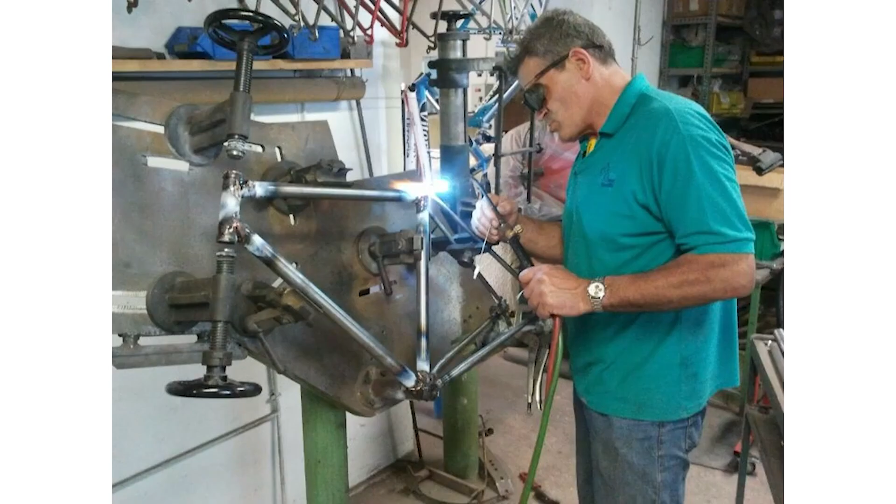When you weld a frame, what happens? When you weld something, what happens? When you weld pipes together, stresses develop in the pipes, right? Your pipes are never in one line. So your front wheel and your back wheel in all our cycles are never true.

If they are highly true, they'll be the best cycles. You'll be having very little load to bicycle. They'll be phenomenal. You'll see the difference drastically. So here the biggest challenge was getting the pipes in one line and getting your front wheel and the back wheel in one plane, in exact one line. And that is the most important test for a bicycle's accuracy and cost.

And we were very lucky. Mr. Munjal, who was the senior guy, was around 75 to 80 years at that time. He came and gave us this very interesting one-line brief saying that we need to innovate. We need to come up with a bicycle which can beat the Chinese competition, but also have a form factor which is very different from the current cycle.

So we were very inspired by him, because at that age he could give that type of phenomenal direction to the project, whereas all other people from marketing and all were talking about their current problems rather than looking at that.

Here the actors are the student, guide and the co-guide. I told you, co-guide is from another discipline. For example, if I'm doing bicycle design, I would take a co-guide from applied mechanics. The professor from applied mechanics was our co-guide in the project. So we have a 3 people team.

Then the second team was from the company CEO. The top management support is very critical. So here we have the CEO coming in very closely. Head of design, GM marketing, and head of export division. This is chosen by them. Hero Cycles also exports a lot of bicycles all over the world.

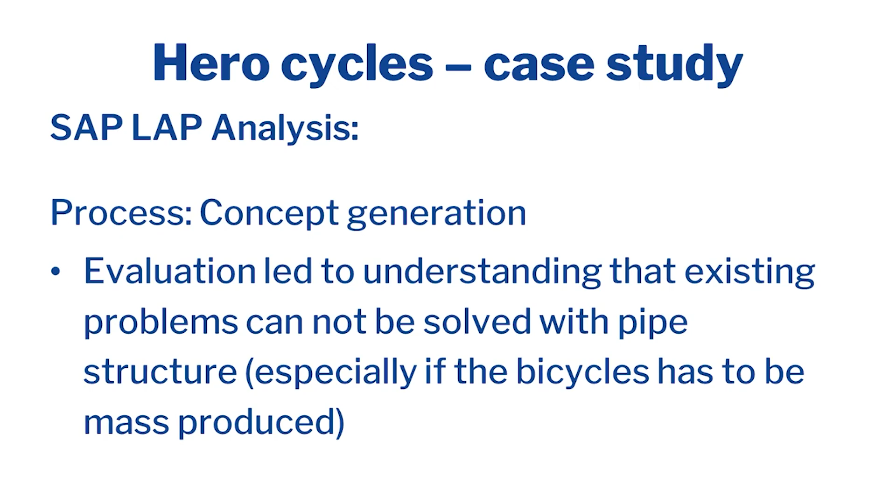So we did the data collection, we found out what all is happening, and then we came up with a lot of ideas which are important for us to see whether we can merge all this and come with a cycle idea. And cycles have been very phenomenal in their simplicity and use. So what type of ideas can we come up with was the biggest challenge. So we want to solve the pipe structure problems. So the pipes were the biggest problem because the welding was getting stuck.

All of you know the bicycles. The weldings were not proper. The welding was taking a lot of time. Then we also looked at the possibility of use of other materials. How many of you have ridden aluminum bicycles, aluminum alloy bicycles? Very good. They're very light, right? What happens when the cycle is light? It moves faster and with less effort, right?

But the aluminum alloy is so expensive that the cycles generally cost 3 to 4 times the regular bicycles, because aluminum is difficult to weld and the alloying is a special process.

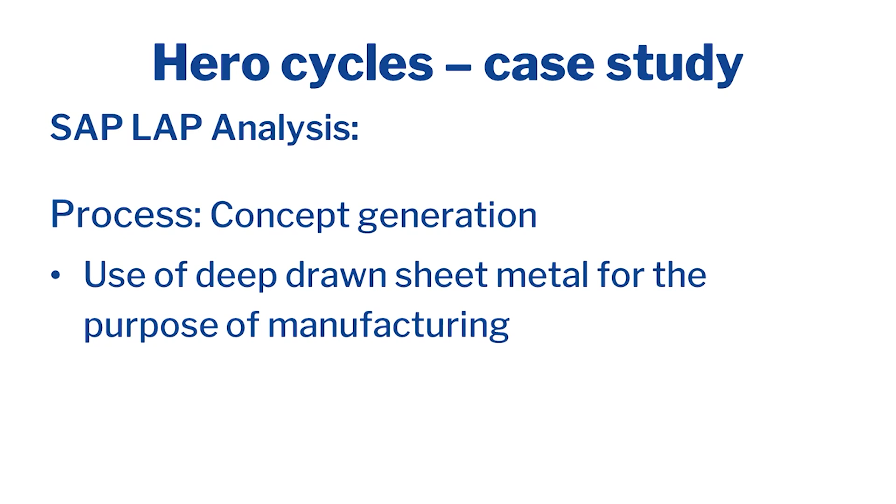The biggest breakthrough came when we did the idea generation for a deep drawn bicycle. How were they manufacturing cars? They're manufacturing cars by sheet metal draw, right? The car body is drawn by large presses. You will see on videos. So when the large press is pressed, you get a whole part at one go.

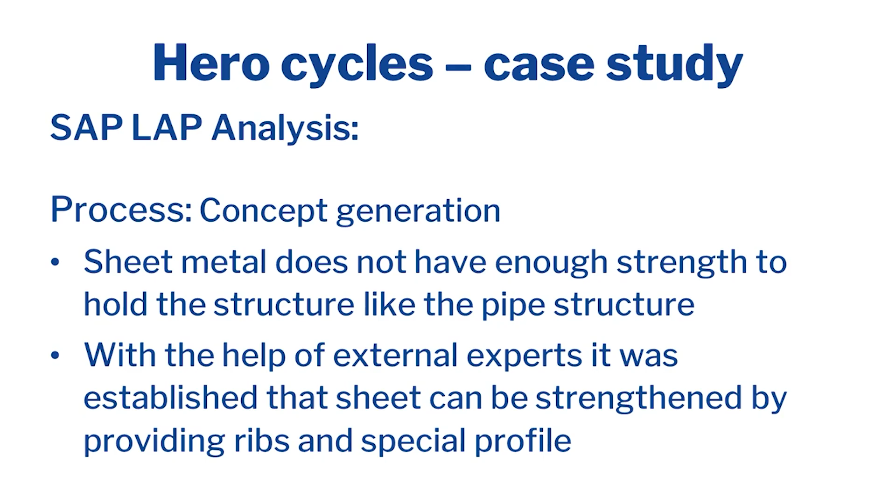So can we manufacture bicycles, rather than pipe welding, by the deep draw process? That was a very big insight, and we'll show you how that insight went forward.

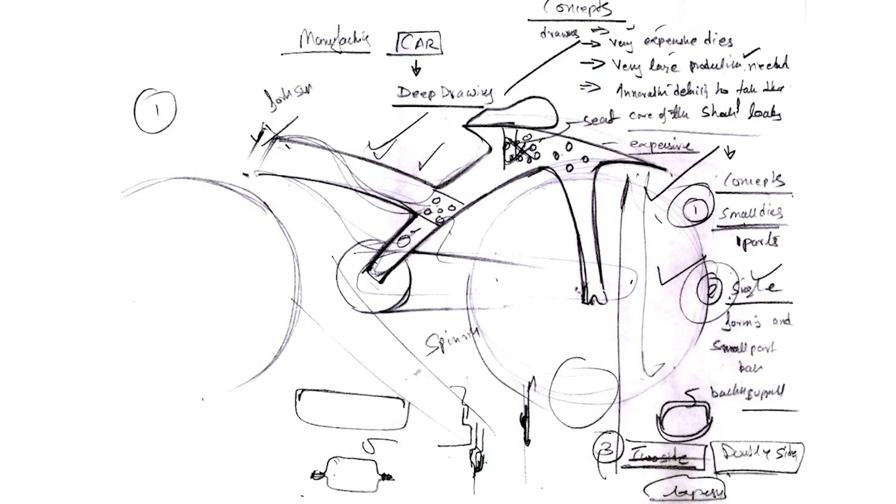So a lot of ideas came up with aluminum, die-cast materials, aluminum pipe structures, mild steel structures, riveting the structures together rather than welding, because that was taking a lot of effort. And here finally you come up with your focus cluster. So here you have 3 focus clusters with 3 different types of materials.

This first concept is a sheet metal drawn bicycle. Isn't it interesting? As soon as it becomes sheet metal, what's happening to the handlebar? It's become very long. Because in sheet metal, if you've got to get the same stiffness, your length of the fork will have to be increased. Otherwise, it will start wobbling.

So this is a very interesting characteristic of a sheet metal, and all this is drawn at one go in a press. So you get a one single frame bicycle. And this single frame bicycle, you can have special alloys to make it very lightweight. Here, for example, you have box pipe frames made up of aluminum. Aluminum box frames are very lightweight and cost effective in welding, easy to weld.

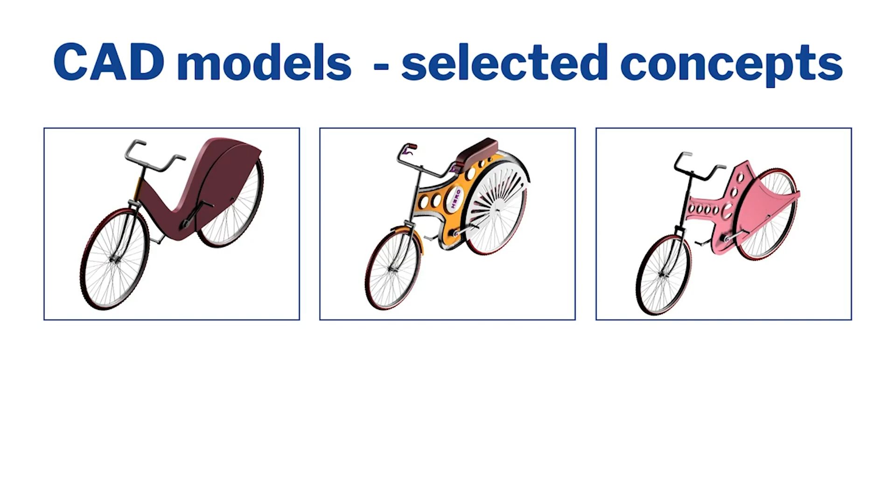So this was on box frame welding. And here it was again a mild steel, structural welding, which was again being used over here. And the sheet metal concept was selected as the best concept because the advantage of using the sheet drawn concept was that it would become very cost effective. The prices will drop straight away by 75%.

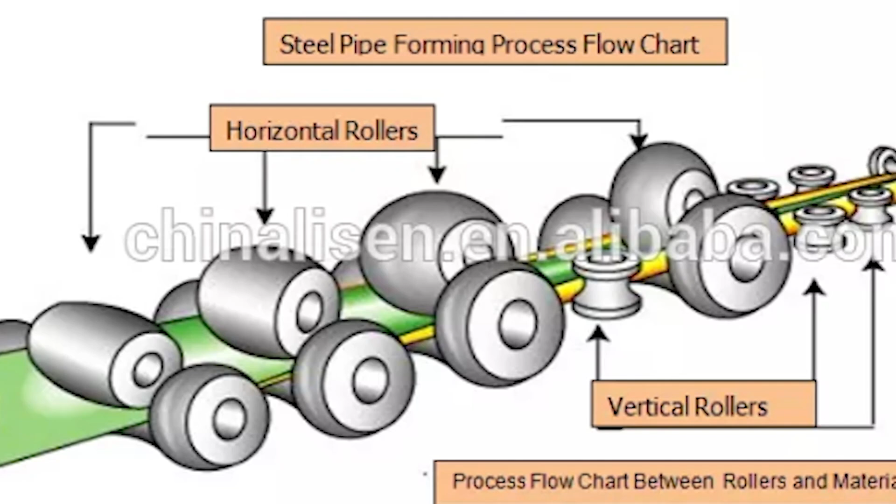Because what happens in a pipe bicycle is pipes are actually sheet originally. They cut the sheets and they roll them into pipes, and that's how the pipes are manufactured. Pipes are not extruded. Cast iron pipes are extruded. Most of the pipes are sort of rolled and welded.

So just imagine if I directly take the sheet and use it, my cost will be very low, and because of the manufacturing process of deep drawing, it's a very fast process. You get no welding, no cutting, so it will become very cost effective. You can see how the whole frame has been built in one go, and then the further development happened.

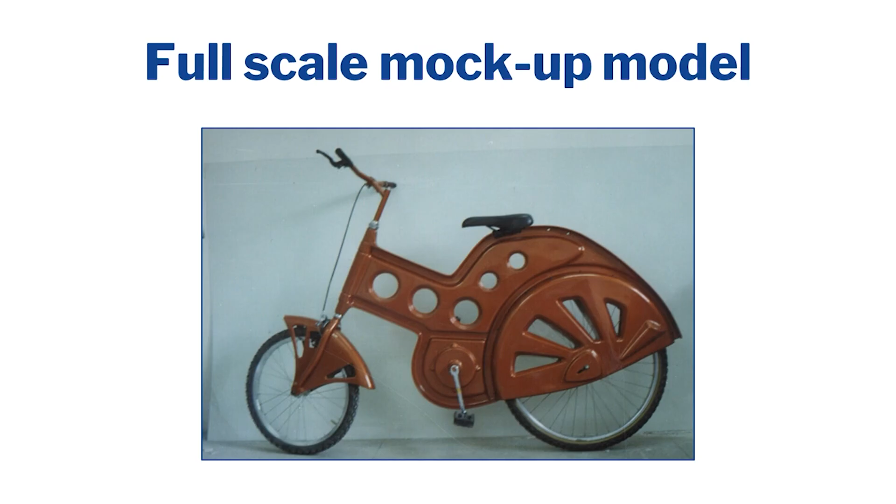And then in the same process, we have something called the mock-up models. Remember, I was always talking about mock-up models here. So you build mock-up models of this to understand how the design would work, and from these mock-up models, we built one full-scale mock-up, non-working mock-up, because you need special steels to make a prototype, and it was very difficult to procure those steels at that time, and you needed tooling which would become very, very expensive.

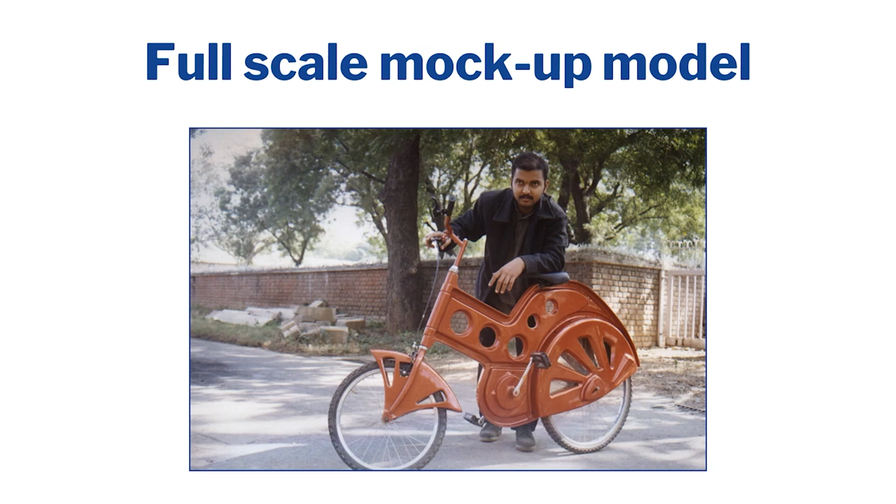So this became the option for us to show to the company, and of course the company was very thrilled to see this product because the cost was actually finally 75% of the current cost of whatever material they were using. But the biggest challenge here was the tool cost was very high. So they had to invest around 50 lakhs in tooling to produce this bicycle, which will be 25% cheaper.

So what did we learn from this journey? The interaction of the first team with the team of experts was iterative in nature. This interaction with the experts who are doing the sheet metal drawing became very iterative, and the concept development happened with experts from the manufacturing sector in sheet metal. At the concept detailing stage, one concept was preferred over the other. The other concepts were not chosen because of the focus.

The main reason for our journey was that we needed to start with the low cost aspect, and all the other concepts were not low cost. So we chose the concept which would result in low cost production. So that was the reason. And the main learning was that the solution to existing design problems may lie in completely new paradigms. What is this new paradigm? Car manufacturing. The car paradigm of deep drawing. And cars are cheap only because of deep drawing and because of the large manufacturing base which they have.

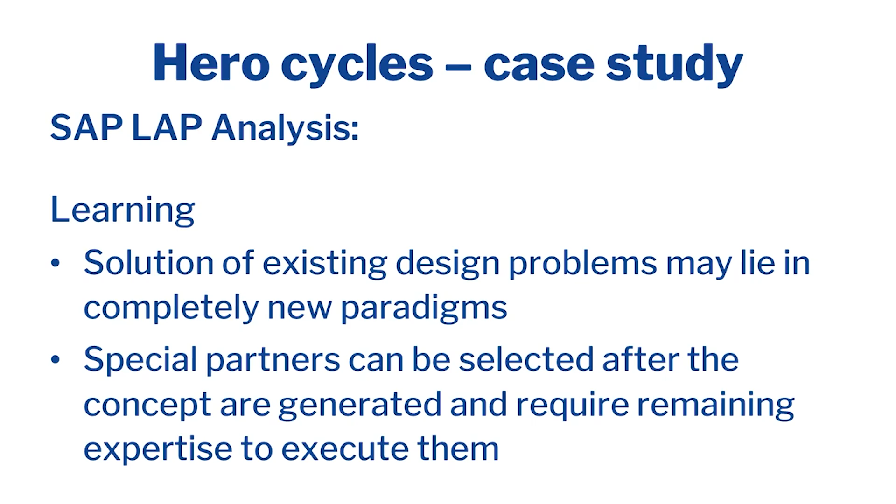And special partners need to be selected. So what is the learning for us for the collaborative team? You need to select special partners, like the people who are experts in deep drawing, the professors who are experts in alloying of sheet. So I had to go to Tata Steel and request them to produce this special grade of steel which can be deep drawn and which will be stiff, because your bicycle can't wobble, right? The sheet has to be stiff.

Of course, the form factor is there. He made the form ribbed so that it will be stiff, but the material also has to have the property. So that was the major learning in this case study, that you need to really bring experts into the field during your design process.

So here, this is the dual chambered bottle. The same journey, a lot of ideas were built, and each idea was taken from a creative analogy. So the first idea was, what if my opening is like the shutter of a camera? There's an opening and closing, right? So if you take inspiration from the shutter, in the dual chamber, for example, the top masala can get mixed with the milk by moving a shutter, right?

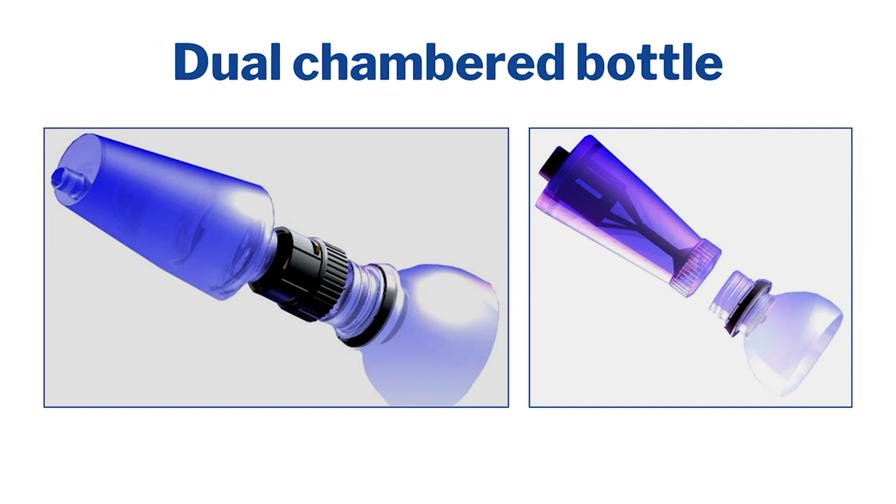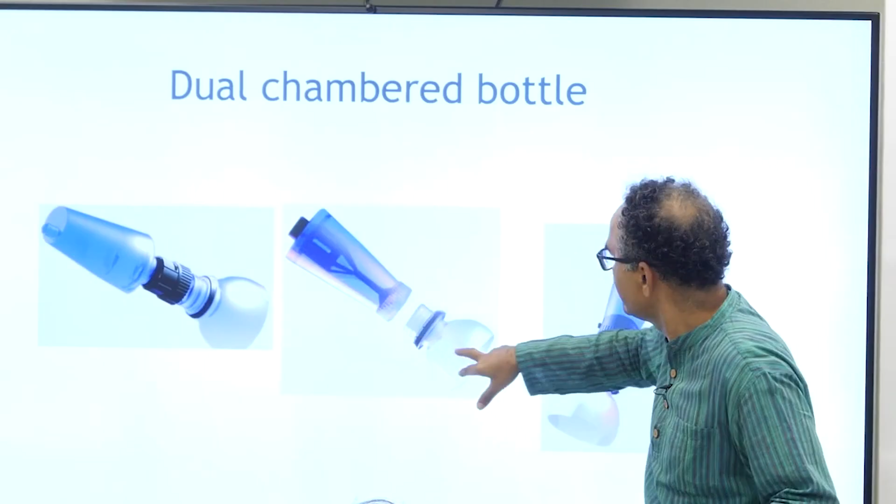So here the second idea was taken from these dispensers, the tubes for ointments, where there is a layer of silver foil, and you reverse the cap and you press and you puncture the hole. So this was like a puncturing mechanism. You have a foil here and you have a button. So this content will get in by puncturing the foil. So this is a puncture mechanism, okay, which can't be reused, of course.

And the third option was inspired by traditional soda bottles with a ball. So with this soda bottle, you press the ball out of its location, it goes and settles somewhere else, and the channel becomes open and you drink. So here, for example, you move this ball and automatically the channel opens because the ball is elliptical. The top masala liquid will mix with the bottom.

So this was a live project. The beverage company was on our back. He wanted a patent for this. When you want a patent for such a product, you have to go and look at your patent search. We found 500 patents for a dual chambered bottle. And my student went haywire. He said, sir, how can I make one more, which is good? But that's what the beauty is.

So as soon as that came in, we talked to the PET manufacturer straight away, and he told us that they are coming with a new material which is 10% cheaper than the current material. So you design with our new material, you'll be able to bring down your cost already by 10%, and then you come up with your other designs. So we put those bottles together, and finally the whole team decided to go ahead with the shutter one, which is more simple, easier to operate and more cost effective.

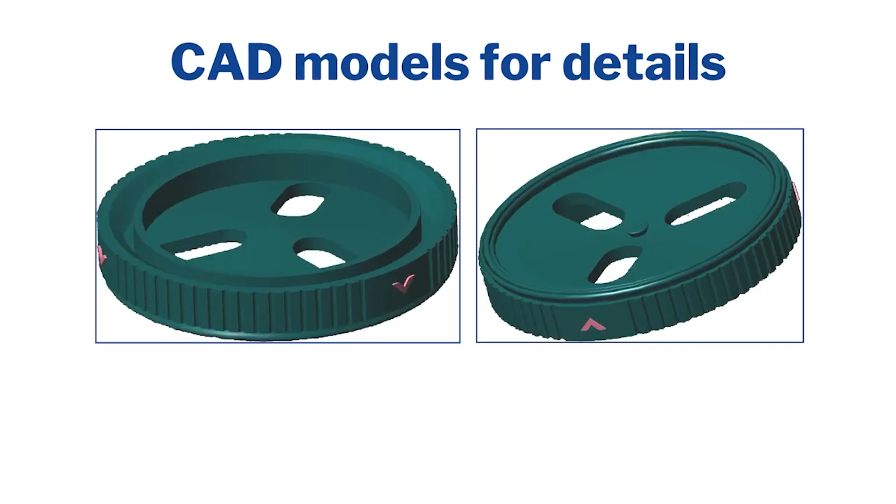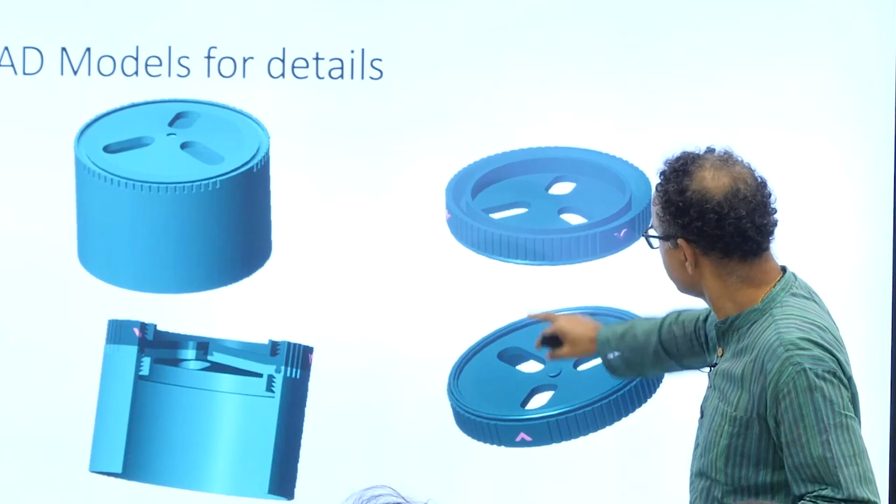And then the actual work of detailing started. So here, how will the shutter work? So here you have this very interesting slope given. Without the slope, the sealing is not perfect. So you have these shutters. When this turns to these locations, it is closed, and when these two match, it's open. It's a very simple mechanism. But the biggest challenge here is it should be leak-proof.

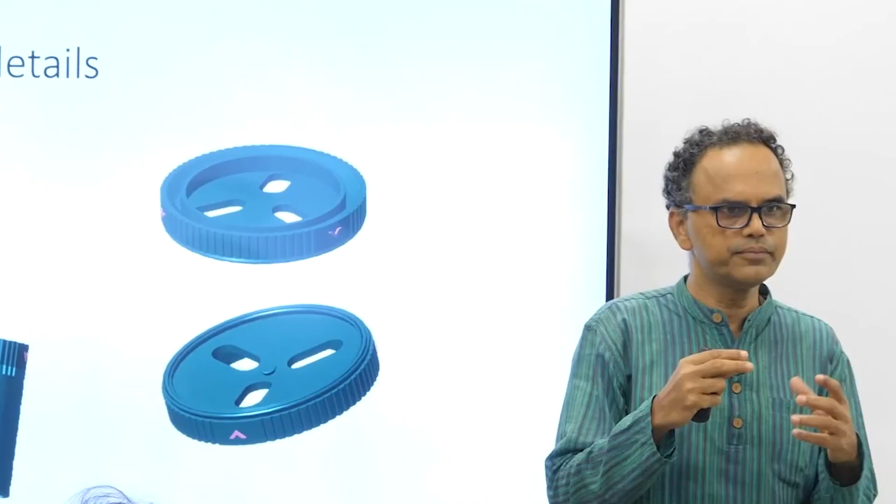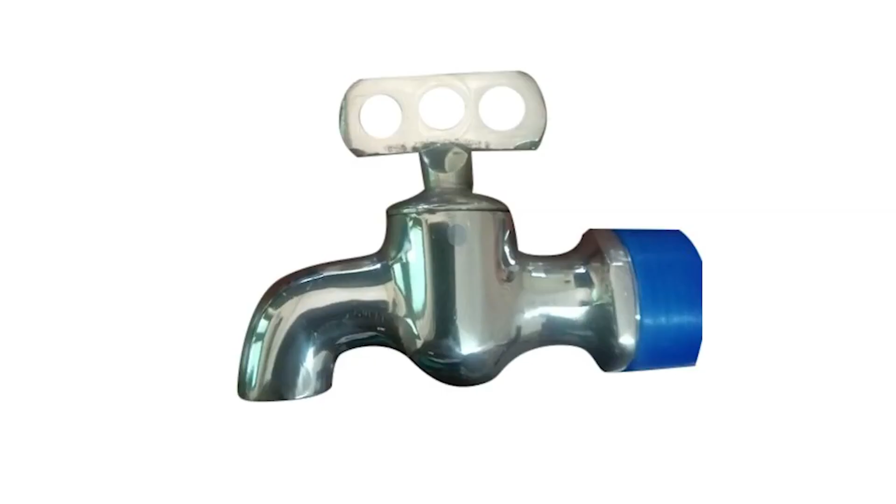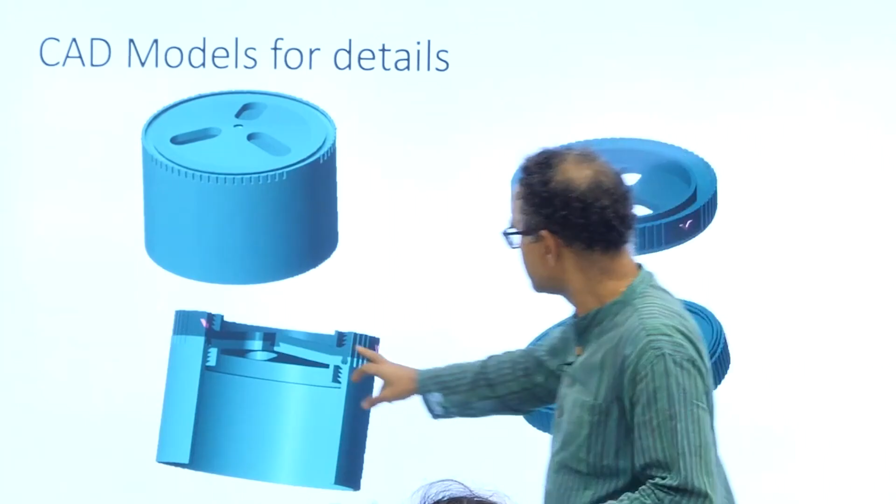And where did we get the inspiration for leak-proof? Have you seen these leak-proof stainless steel taps with a rod? What happens in them? It's just a taper, right? And in that they put a brass receptacle. So because of the taper, it goes and locks. There's no rubber there. So we took inspiration from that design, and we use this taper over here. So this is no longer flat. This is tapered. So when you lock with the taper, you get a very good waterproof design.

So these were designed, and then finally implemented in the bottle. And the bottle was just 15%, not 10, more expensive than the current bottle, because the plastic pieces were extremely low cost. So the bottle had the turn in the middle. You hold the bottle, turn the ring on the top, and your top content will get mixed with the bottom content, and the dual chamber bottle was ready.

So the client was wanting a patent, so we got it patented, and after that we really don't know what happened with the product, but we're hoping that he's manufactured it.